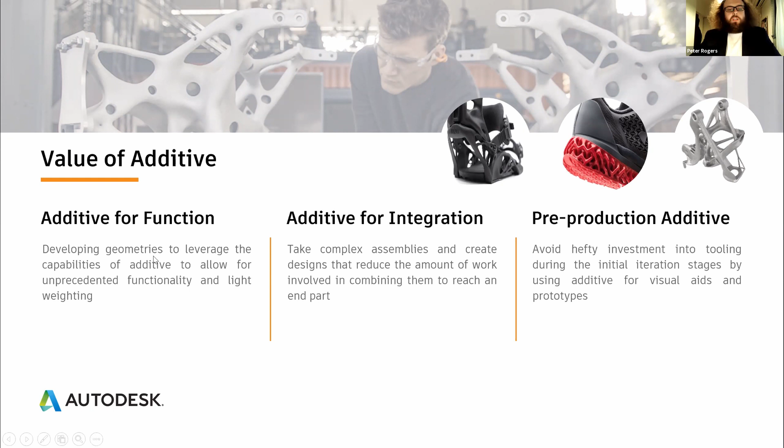Because of the new design tools, we are starting to see more of this additive for integration and additive for function. So with this, we understand there are a lot of different positives and a lot of different ways people are using additive to improve their products, but there are also some known industry challenges.

Some of them are around design. Making sure you have the right design going into the machine and getting the best value out of that part is something quite a lot of engineers are still having issues trying to figure out the best way to design for. Another thing we're looking at is speed and cost, relatively similar in terms of the outputs for both of these. Speed relates directly back to cost, so I like to bundle these together.

Making sure that we are getting parts out of the manufacturing technology as quickly as possible, in order for them to start manufacturing the next round of products, but also looking at the cost-effective points to make sure that the machine is deriving the greatest ROI possible. So these are some of the things we are looking at.

One thing relatively unique to repeatability is that there's a lot more opportunity for production-level parts built in one machine to be sent to a different machine and have relatively different results in terms of geometry distortion, as well as density of parts. A lot of that comes down to how they're being prepared by different engineers, as well as aspects around material handling. So repeatability is still a relatively large hurdle in order to take parts to distributed manufacturing or larger scale production.

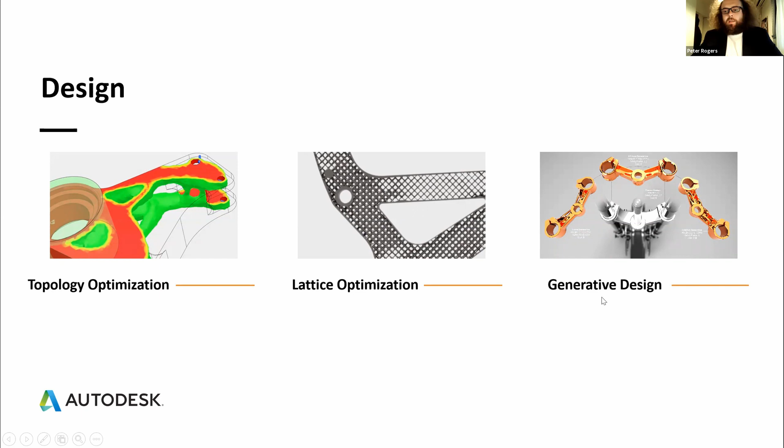It's a very large topic, so I'm not going to go into that. I'm sure there will be a few different sessions we can watch during the summit, so make sure to check out the generative design functionality as well.

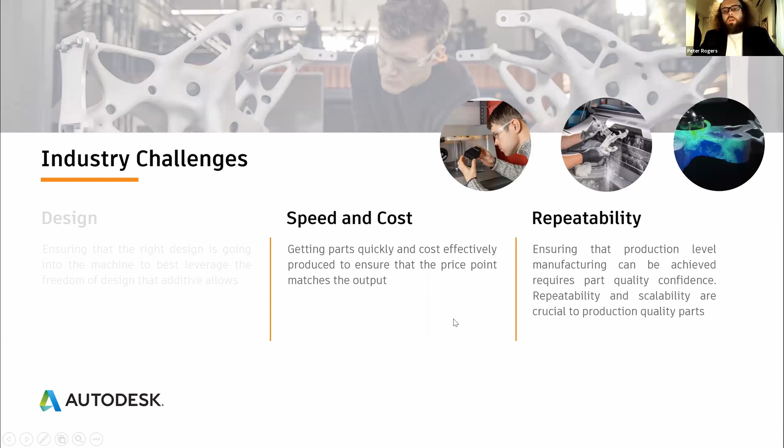Now that we've had a very quick and brief introduction to some of the design capabilities, I want to start looking more at the automation side of things, and the way we can improve the production of our customers.

What I want to do today is focus on the actual end value, but in order to do that, I'm going to focus quite a bit on the HP 3D printing machines. One reason for that is we are relatively large users of HP - we have two machines in our Toronto and Birmingham facilities, so we are very familiar with them. But the other thing is they have a lot of benefit from automation. I'll go into that in a moment.

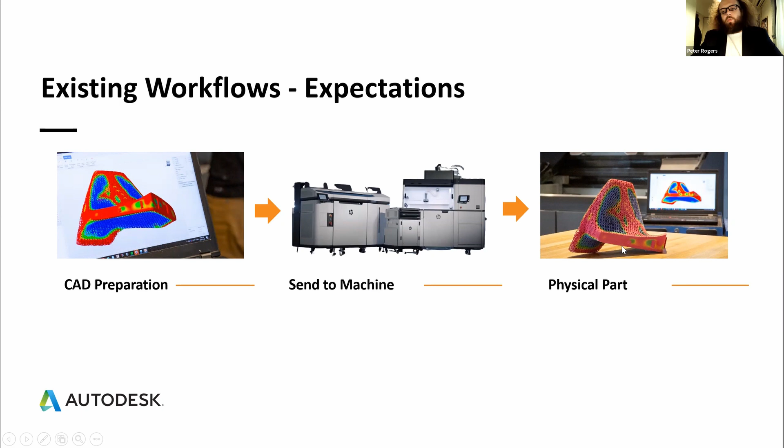In terms of expected workflows for these technologies, a lot of people would expect the term printing being in the name - they think about generating a Word document, clicking print, it goes to the machine, and comes out the other side. That is the expectation. When it comes to reality, it's not that easy.

Quite often you'll have people that generate the CAD. Once the CAD preparation is done, they send it to a team that's going to prepare it for manufacturing. A lot of the time that will be data conversion followed by STL checking and repairing, making sure the mesh is going to be solid, and ensuring the minimum criteria for the machine is being met.

Quite a lot of the time this will be minimum wall thickness. There will also be minimum feature size, minimum gap between parts, these sort of things. And once we have that confirmed, we also then do a trap powder or resin check.

Because it is going to be building it up layer by layer, if we do not have efficient ways of getting powder out, there could be the opportunity for powder to get trapped in. So we want to make sure that there are no areas that have a negative volume within that part.

Next, we look at going at 2D or 3D packing. Once we have those 2D or 3D packing capabilities checked, we will go into a packing distance check to check how much distance is between each part. Based on that, we can understand whether or not we need to add more parts to the build or if we need to bring some out in order to relieve some of the energy being absorbed into the powder. So that's, again, looking at the layer density check as well as the packing distance check.

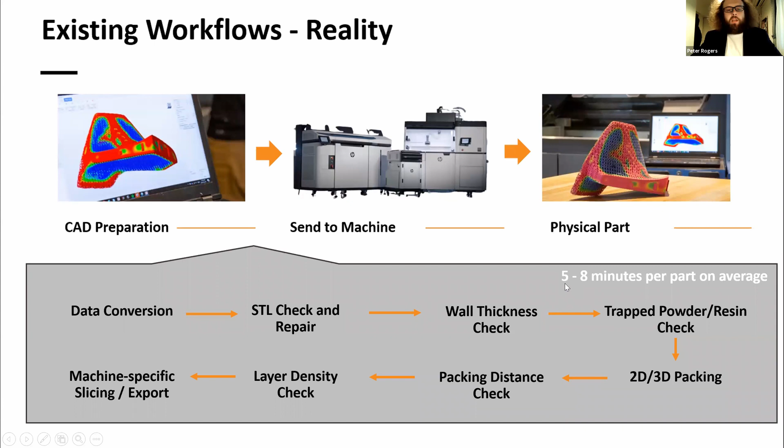And that average workflow would look at being about 5 to 8 minutes per part on average. Once you've done it for one part, again, you can create multiples of that part within the machine at the same time, which is relatively fine. But if you are going to be looking at a brand new geometry, this is roughly the amount of time that you would be looking at doing that check.

So if we look at some of the strengths of HP Jet Fusion, the full build zone is what's available to be used. If you aren't packing it as densely and as smoothly as possible, then you can have the issue that you might not get as much out of each of those builds as you might be requiring.

Some of the customers that we speak to are looking at getting between 300 to 500 unique parts into the machine at one time. Others that are doing more mass production might only have one design, but they're manufacturing multiples of that design at the one time. So there is a very good strength around this compared to looking at, for example, short life production using injection molding. So there is still a very, very large amount of benefits to this technology.

Some of the limitations of that, of course, as we mentioned before, each of these parts does need around 5 to 8 minutes of checking before it can be deemed suitable for 3D printing. And that can be a very large strain on engineering resources. So what we want to be doing here is we want to make this as smooth as possible.

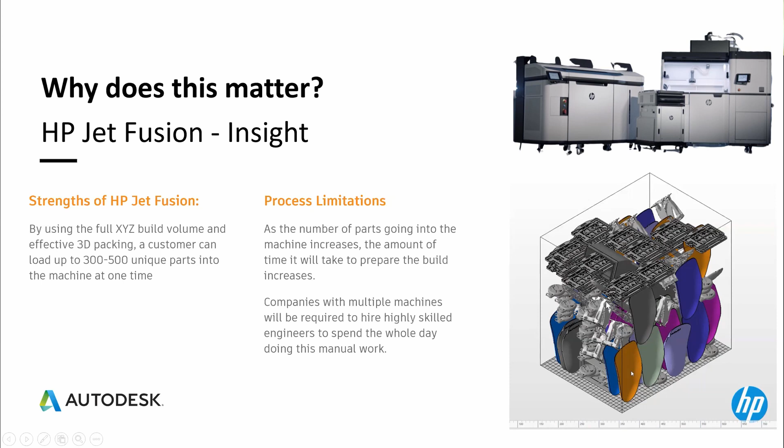The other thing is that quite a lot of the time, the people that actually do the preparation for these machines are relatively highly skilled engineers, and they will be spending most of their time during their day checking these parts. So if we have a look at some of the things that can lead to, it's some of the known hurdles for mass production.

So again, at the top, we're looking at mass production here, in that some companies will be, of course, looking for repeatability. If they've got a part that is in production that is being used in devices and they need to create a repair part or something similar, then what they will be looking for is making sure that there are no differences between the two parts that are going to be negatively impacting the usage of that end part that we are looking at manufacturing.

One of the things that comes up is distributed manufacturing, where you might have a 3D printer in a factory in the US, in Europe, in Asia. If you send the design to that machine, you want to expect the same quality of part coming out, irrespective of where it is. So that's some of what we see around repeatability.

The other thing is looking at cost. When we have multiple machines and a high amount of parts going into them, we want to reduce costs. A lot of that comes from the amount of time an engineer needs to prepare a pack, and often these are very tedious manual data checks, not the most engaging work. So to keep highly skilled engineers engaged, we want to reduce some of this work. That's one of the other reasons cost comes up.

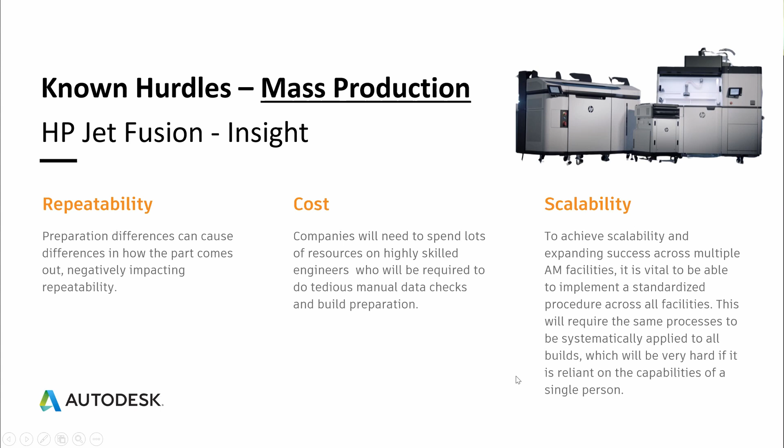They might have to do a lot of manual checks, and compared to mass production, there are a lot more parts to physically check. Because of that, data preparation time will skyrocket, which can mean delays in getting parts to the customer.

The other thing is cost. A mass variety business is probably a service bureau, and service bureaus are focused on making money. To do that, they need to cut costs where possible and get parts out as quickly as possible. That means they'd either need to quote higher than usual, or accept lower profitability if doing it manually.

The other factor is scalability, but viewed differently. If a very large B2B customer comes and says they want a part manufactured at a very high rate, or wants a prototyping contract, the volume of designs could exceed their capacity, meaning they might have to reject certain jobs. They might also need more engineers, which negatively affects profitability since they take on more costs to deliver more parts.

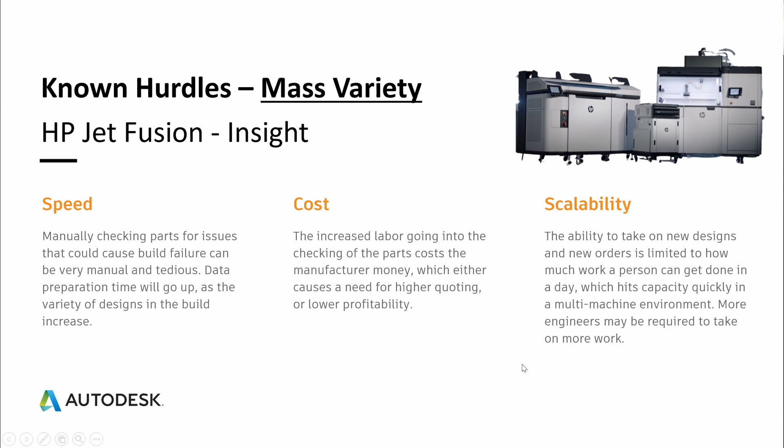So what does Autodesk have to support some of these issues and hurdles?

So a little bit of a humble brag again - 3D Software of the Year at the 3D Printing Industry Awards. Autodesk Netfabb is a very high-end software for 3D printing preparation.

If we have a look at the general workflow that happens within Netfabb, we have the acceptance of design, or CAD. We import it directly into Netfabb. We can do some basic optimization of latticing, we can do topology optimization, and we can also do surface latticing as well.

We can then do basic repair functionality. As I mentioned, STLs have a lot of errors within them, so we need to check them sometimes, and if there are any errors, then we need to effectively repair them.

We then need to look at either 2D or 3D packing. We then need to make sure that the part is going to be as close to the CAD as possible, so if required, we might need to do some near net shape adjustments. And then looking at the build supports if it is a machine that requires supports.

Once we have done that, we create the toolpath, or we create the slice data that then goes to the machine. In the case of metal 3D printing, there is a lot of stress that comes up with the powder receiving the heat and the energy from the laser, so that creates quite a lot of stresses within the part. Based on that, it will cause us to have to do simulation to make sure that there are no issues during the build, and once we have done that, then it can go to the machine.

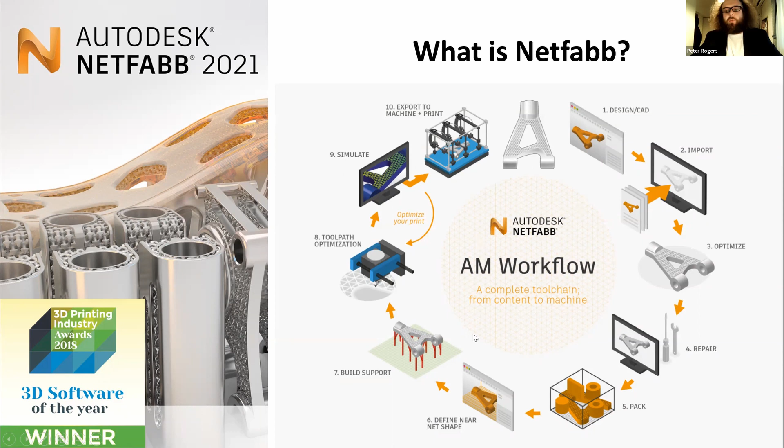Again, this workflow, based on the conversations that we previously had about the HP workflow, a lot of this ticks most of the boxes of what people are doing with their HP technology at the moment. So we can take quite a lot of the work that they are doing, except for the base CAD design. Netfabb is not a CAD tool, but we have, of course, Fusion. We have a lot of our CAD tools that can do the base CAD design, and everything after that is what is looked after by Netfabb in terms of that additive manufacturing workflow.

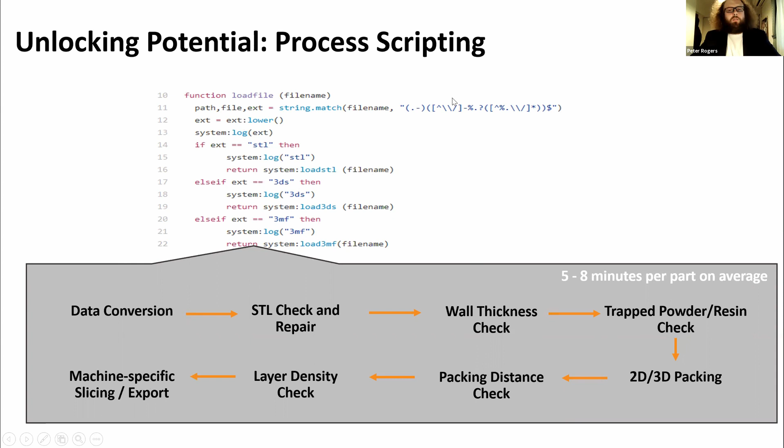Because we have it all in that one tool, we are able to take this entire workflow and use what we call Lua scripting. It's a scripting language that is not Autodesk manufactured, but it is a relatively standard scripting language, which takes each of these different individual functions and workflows, and we can actually script them to make it so that it runs one after the other and delivers an end result, which could be anywhere along this process. So depending on the customer and what they want to be doing with Netfabb, effectively almost all of the functionality within Netfabb can be operated using this scripting, which allows for automation of processes.

To give you a quick idea of what one of these workflows might look like: a company might have 200 or 300 different parts that have been uploaded to a Dropbox by a variety of different companies within their manufacturing group. A script could import all of these parts, tessellate them, turn them into an STL, and then, of course, do the wall thickness check. Based on the passing or failing of that check, we could have all of the parts going into a pass folder or a fail folder.

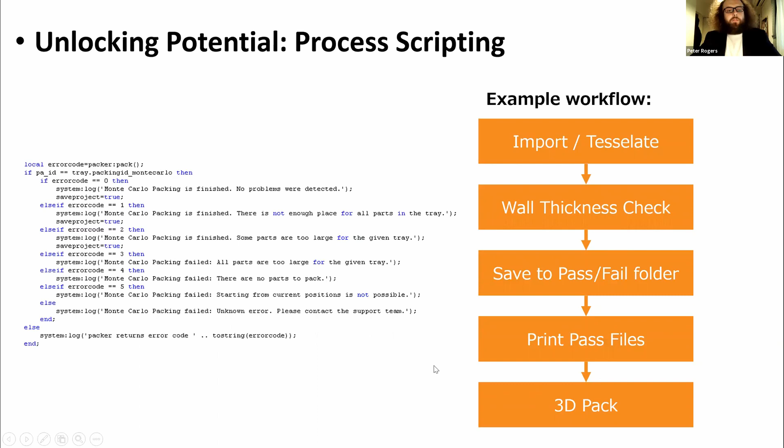Based on that, we can take all of the parts that have passed the wall thickness check, bring them into a new, for example, HP workspace, and 3D pack them based on the actual XYZ geometry of the build pack to make sure we are getting as many parts in there as possible. Instead of having 200 or 300 parts that they would need to individually check, they only need to check the fail folder. Instead of spending multiple hours checking and confirming that geometry has passed, they just have to look at the problem geometries, which could have specific areas that need to be fixed. So again, this is a great way for users to confirm geometries.

I just want to do a quick video of this to show the proof of concept, which we have implemented internally and is also being used by a number of our customers.

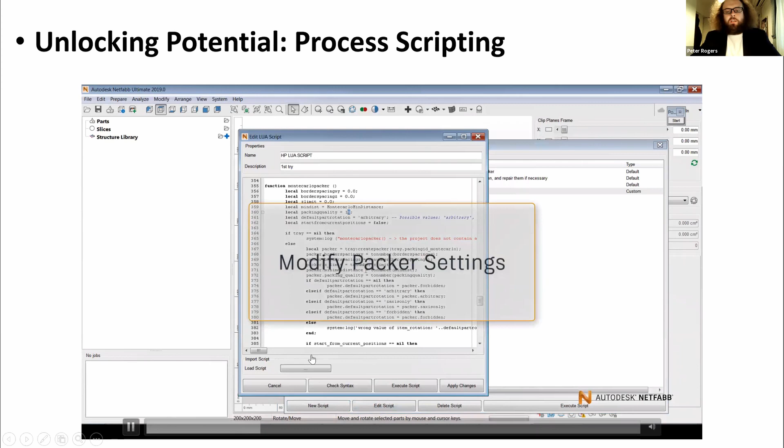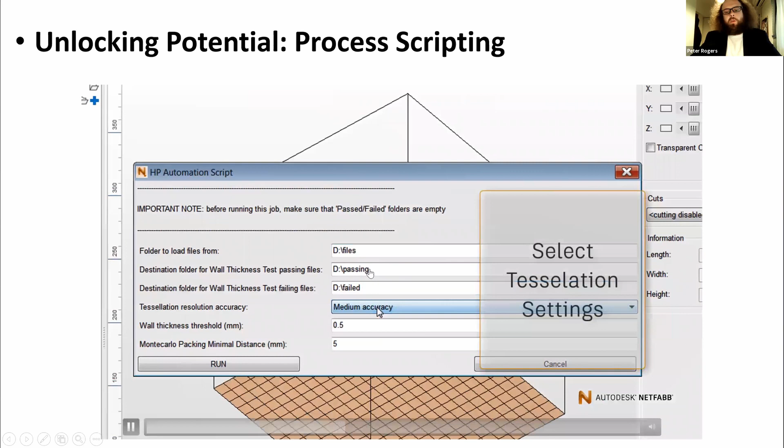As I mentioned, we have the script here. It's fully customizable, you can edit anything in here, and add specific functions in between certain things. What this is going to do is bring in these parts, check the folder which we have set up as files here. We have passing and failed folders for them to split the data into. We're going to tessellate and check for a wall thickness of 0.5 mm.

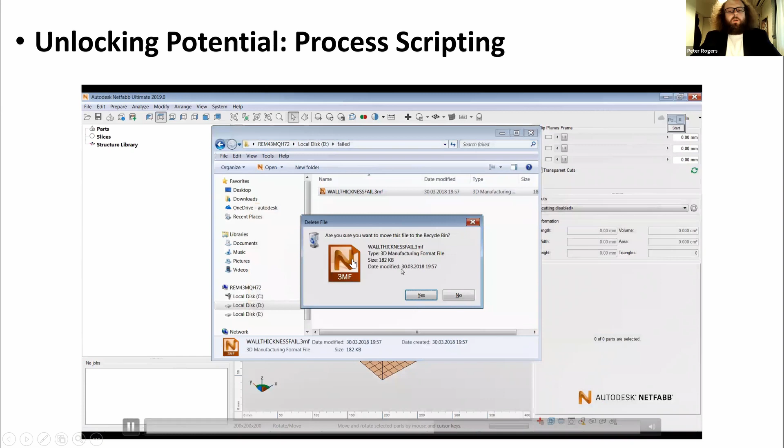So if we go into the pass folder and remove all of the parts currently in there, this is going to allow us to have an empty field. We have these files here, and one of these files is not meeting the requirements of that 0.5 mil wall thickness. At the moment it's showing as 0.2 mil, so that's a part we want the system to weed out.

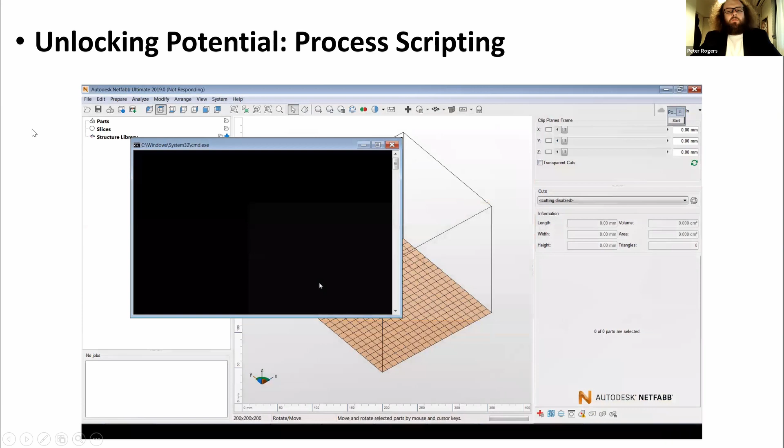So again, based on the scripting, it runs in the background. It imports all of the parts from the pass file, and we can see here that the part identified as not meeting the criteria is separated for an engineer to look at. They might have to go in and speak with the designer that requested the part, because it's not going to be able to be created by the machine.

Again, if we look at some of the steps we went through here, we did see there was quite a lot of automation. You can pre-populate a lot of these windows that were popping up along the way. Based on that, it's a very repeatable process that is going to be applied to every single part in the exact same way, so there's less chance for human error or differences between engineers across different facilities.

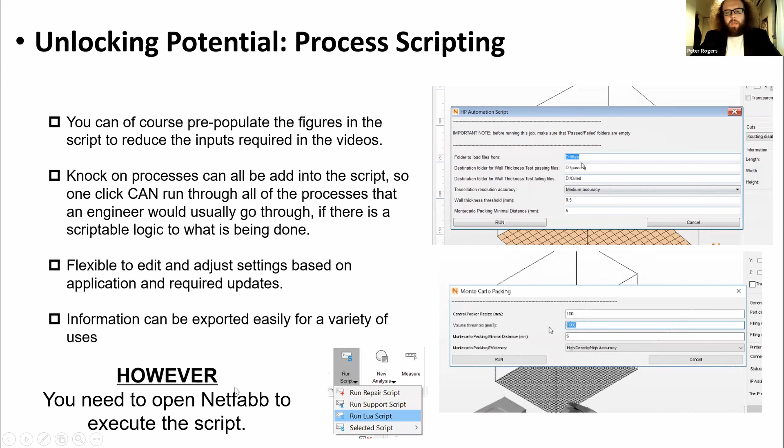However, one of the things people pick up on is that we need to actually run this via the UI. We need to open up Netfabb, click Run Lua script, select the script we want to run, and it runs based on human engagement. So in other words, it's a semi-automated process, but there is still room for improvement.

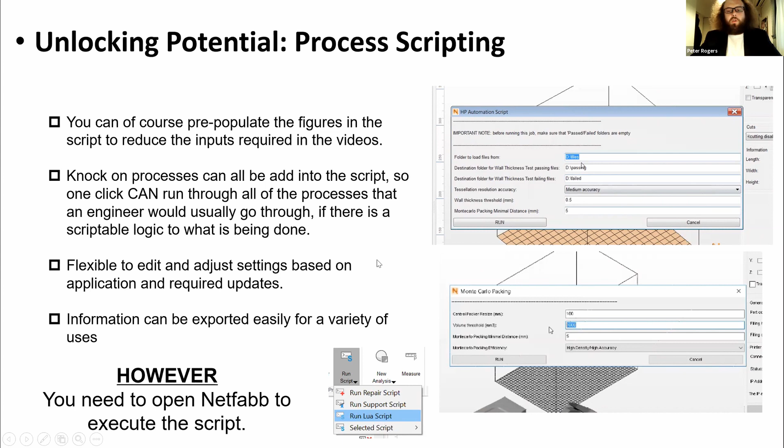That's one of the reasons why we've started to implement our Netfabb Application Server. It's a RESTful server, effectively an API that connects to external services. You might have an external storage system, or an external distributed task management system that's triggered when you receive a new file. That can use the API from Netfabb Application Server, or NAS, which will send that information across to the Netfabb Lua script and trigger it inside Netfabb.

So instead of having to do these manual engagements with the software, this can actually work as a method for connecting your services to the Netfabb software.

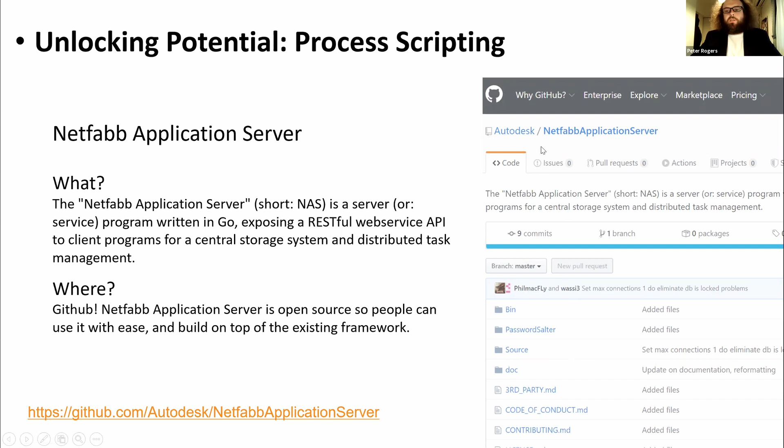Where can you find specific information about this? GitHub. It's an open source framework so it's very easy to use, people can build on top of it and implement it with their own systems. If you search the link at the bottom, you can find all of this information, or simply search Netfabb Application Server on Google and it should pop up.

So to give you an idea of what a workflow could look like using NAS and Lua scripting: a designer has created a 3D design that they want to 3D print. They send that to the server via a website, an app, or something like that. Based on that, the manufacturer server would then use Netfabb Application Server, or NAS, to pull that information into Netfabb, and it would trigger a script.

Once that script runs, as we saw in the video, it processes all of that data and takes the results, pushing that workflow output back to the server. Depending on the design, it could send it back to the designer to say this is sufficient for 3D printing, but you need to improve the wall thickness in these areas.

Or it could say this is not a suitable design, there are problems with the STL, please confirm. Otherwise, it could literally just send it directly to the machine and begin the printing process. So there are a few different ways we can use this, and it is fully customizable, so you can implement it in the way that you see fit.

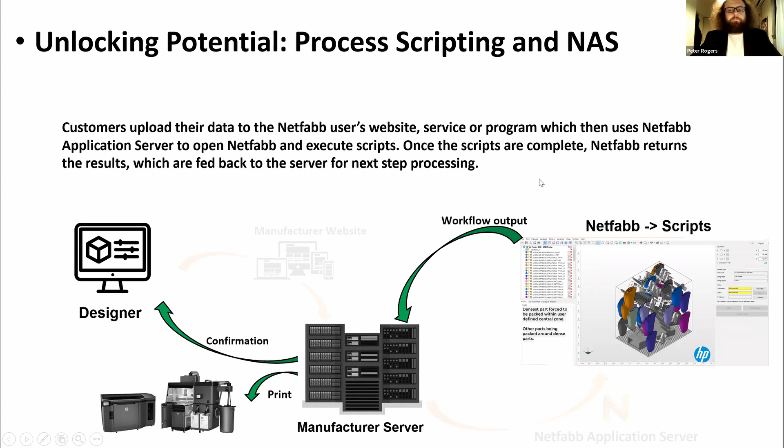Based on that previous discussion around the design going through the server, having all of these different processes done, if it was a design that meets the criteria, you could have all of these things complete, and then just send that geometry to the 3D printer for manufacturing.

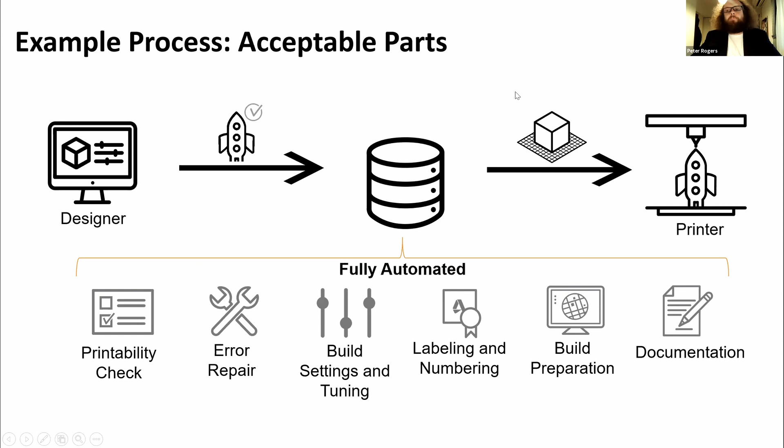One of the other things that could be done, of course, is if that part was not meeting criteria, after all of these automation steps are done, we can actually send all of this information to Microsoft Office 365, which would then pull this information, and you can automatically import it into a template you have created, which could then automatically be sent back to the designer.

So this is a great way of avoiding having to do all of these manual checks for the dozens or hundreds of designs that are coming through the customer's website or from their sales teams. And it allows them to scale up without the additional costs.

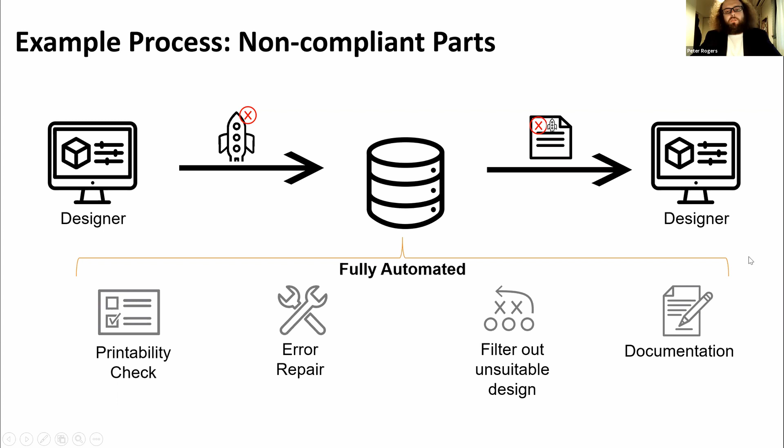So a customer that has implemented this effectively is a company called SOLIZE, based out of Japan. What they are doing is receiving designs such as this onto their website, letting customers know where the errors are in the design.

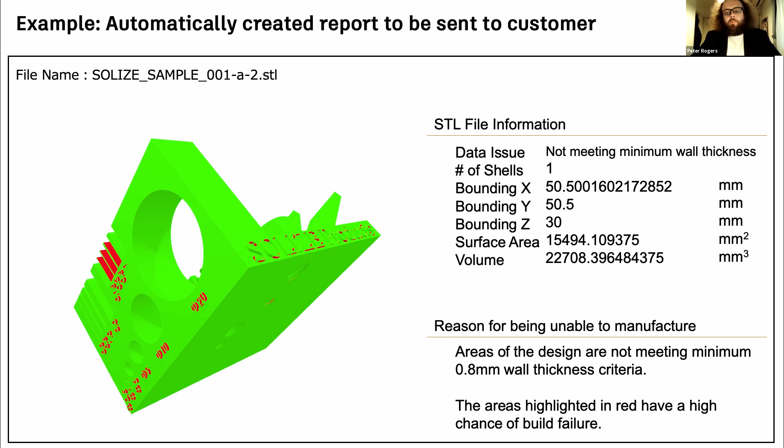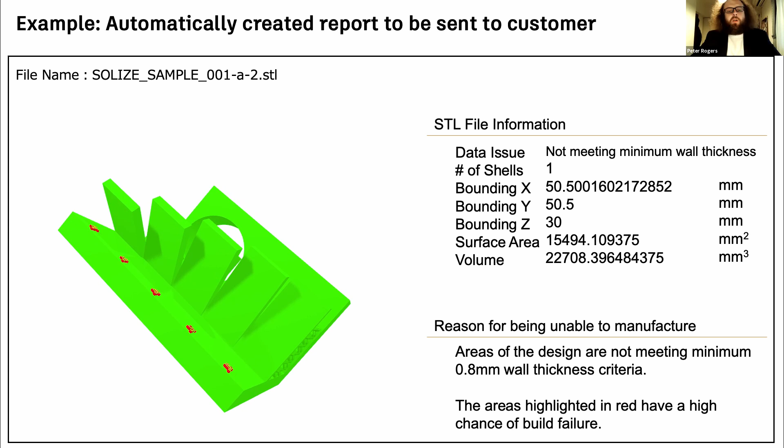What we have done is highlight the different areas of the design in red that are not meeting the criteria. As we can see here, it needs to be a 0.8 mm wall thickness, and the areas that are 0.5 are not meeting that criteria, so they are highlighted. Similarly, these minimum features are not meeting the criteria, so they could have areas of failure.

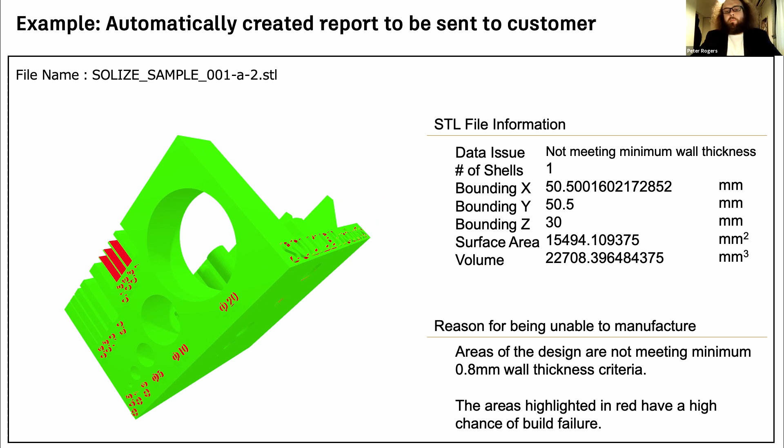So we want to make sure that the designer is aware of these potential risks, and if they accept that, then we can go to manufacturing. It's a great way of making sure that the service bureau is not taking on risk for potential failures within that print.

So what we want to be doing is standardizing that process and making it applicable for a variety of different places to do manufacturing. The other thing is, again, it's time and cost consuming.

So if there was a requirement to go an extra 3 or 4 parts above the current capacity of the individual engineer, it would mean they would potentially reject that work because it's not going to cover the value of that gap. So again, there are a number of issues with manual processing.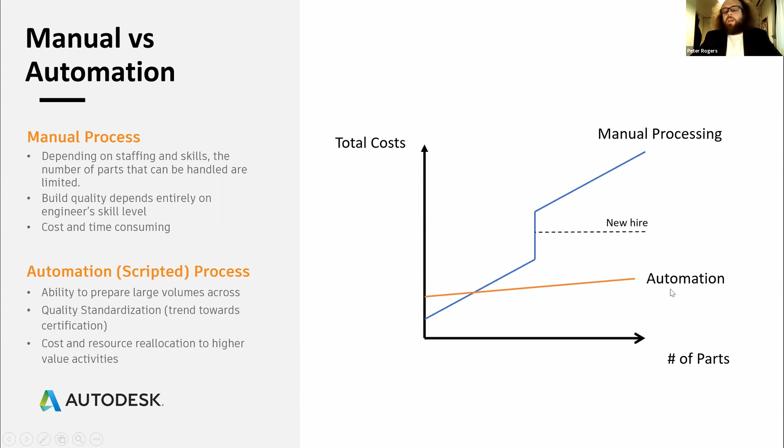And this can then further help them gain access to various other industries as well.

To get a little bit further into some of the ROI calculations, I'm not going to go into all of it. You can read some of this in your own time, but the value we're looking at offering is a very simple cost analysis.

Again, it's not taking into account every single part of the equation, but just a basic part time multiplied by the part number, divided by 60 minutes per hour, in order to find out how many hours we're going to be working on these parts. And then having a look at W, which is wages, multiplying that out per year.

And then if we just look at a basic implementation and software cost setup of around $20,000 per year, we can have a very nice ROI calculation here.

So if we were going to take a rough estimation of some of these, we can have a look at, for example, Service Bureau ABC. They will have 100 parts coming in. It takes their team on average 6 minutes to prepare each part, and their engineers are getting paid around $30 per hour.

Based on this ROI calculation, you would be having a look at 6 minutes per 100 parts, so that's around 600 minutes for preparation, about 10 hours worth of work, at $30 per hour, multiplied by the amount of days per year. Assuming around 250 days per year, and then dividing that by the cost in order to get the ROI.

Based on this very rough calculation, we can see that there would be a cost savings of around $55,000, or an ROI of around 375%.

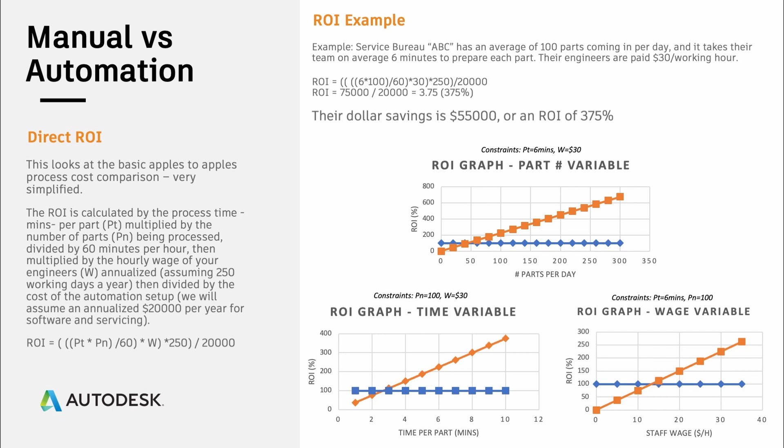But of course, it's not just about the direct ROI. There are a number of other benefits that come with having an automated process in place, and some of them are listed here. Looking at the knock-on benefits that are not directly ROI is quite important, so we want to look at some of them.

Standardization of process is going to be very beneficial for repeatability and certification. Freeing up engineering resources is, of course, of high value to customers so they can start focusing on higher value activities or building out new capabilities.

Also, looking at reduced costs is, of course, going to be beneficial. That cost saving could be passed on to the customer, which could further increase the demand for the parts that are going through their machines.

Looking at 24-hour processing is, of course, something that is very beneficial. The amount of time it takes to get a quote out, or if there are any geometry issues, dealing with them quickly helps you better close the conversion. So higher conversions mean better business, which can lead to a better revenue source for you.

Also, looking at reduction of human error, this is again something quite important. It connects back to standardization, and also connects back to repeatability.

And then having a look at some other points around scaling a business. If you have one machine, going up to 2 or 3 machines could be quite costly in terms of engineering costs. Having faster and easier onboarding of new staff, if they can just do a 1 or 2 button click in order to achieve most of the work they need to be doing, really helps ensure they get onboarded faster.

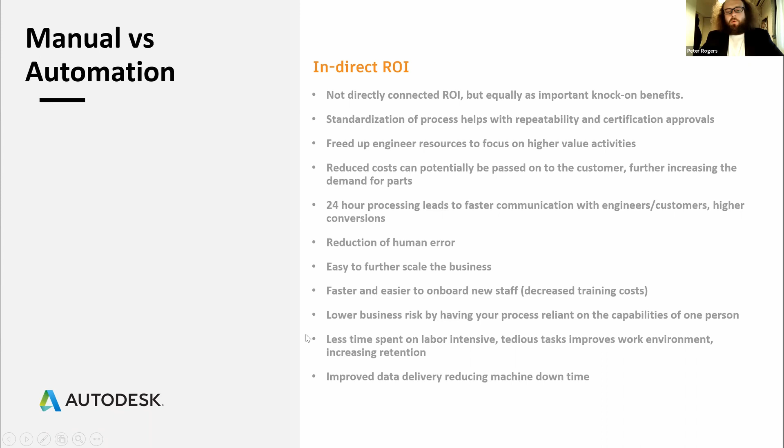So at the moment we've done quite a lot of conversation around plastics, but automation, as I mentioned, has functionality across the entire Netfabb portfolio. There is a lot of automation that we can do for metal as well.

One of the things we have within that portfolio is taking a part, automatically orientating it, automatically creating supports, and then sending it for simulation to check how much distortion will happen during that build. If we look at these four different orientations, a skilled engineer would probably be able to tell you this is probably the best orientation for this build, but it would be more of a gut feeling than based on science.

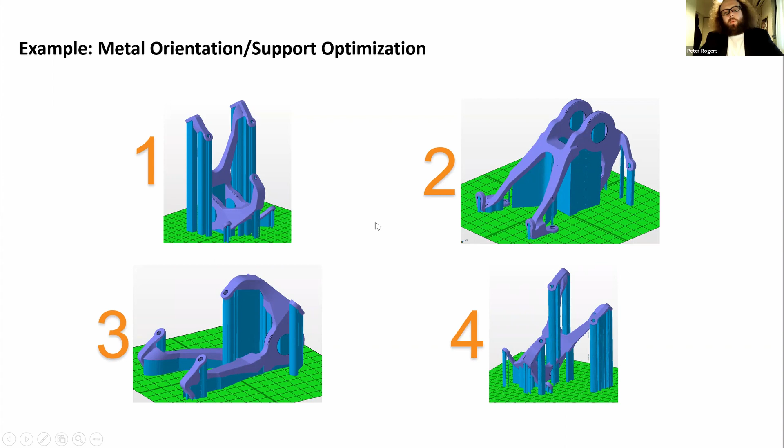So what we're looking at doing here is creating a script that takes the capabilities we have in-house, such as this specific 3D printer and this material, and we would create the thermal and mechanical simulation files needed to do a full part simulation of this.

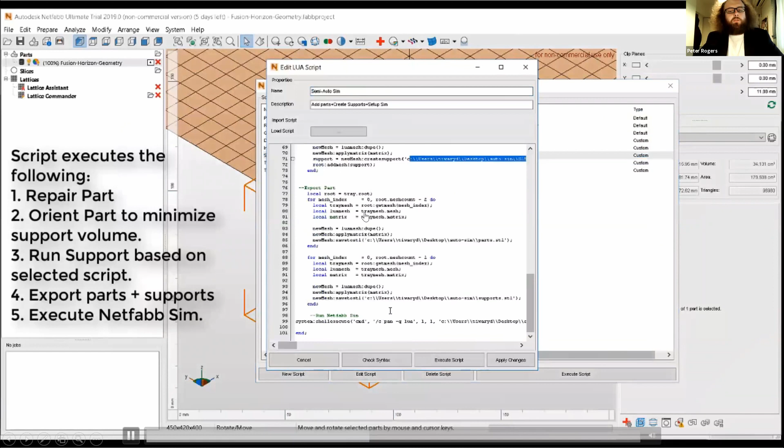Based on the script, in this case what we're going to do is repair the part, orientate it for multiple different orientations, and use a standardized support script. Based on that, it's going to pull that information into simulation files and run those simulations on these various parts. As we can see, it has started to do the simulation based on this orientation and these supports.

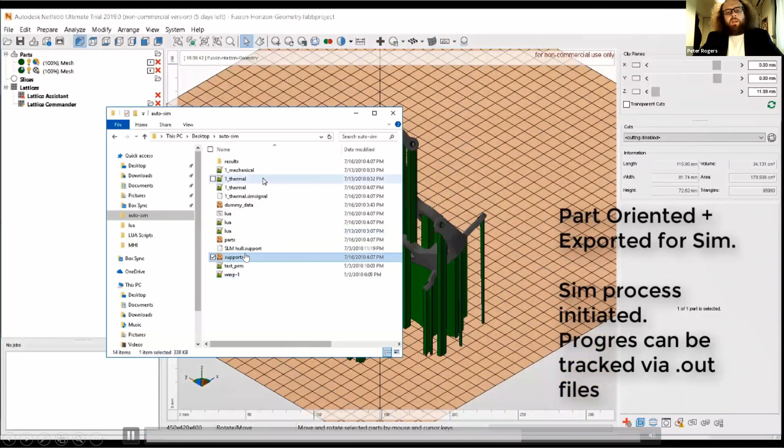These parts and supports are already pulled into the thermal and mechanical simulation input files, so when we open up simulation it already has all of this information in here for us, and we can do a thorough check of what is going to happen during that build.

And that is it in terms of orientation for automation. So again, we had the conversations around HP's automation for plastic parts, the simulation capabilities and automation for metal parts, and there are a number of other functionalities that we didn't introduce here. In terms of what you guys can do with the software, the sky's the limit. If there are certain things you would like to optimize or automate within your current processes, let us know so that we can start working on it with you.